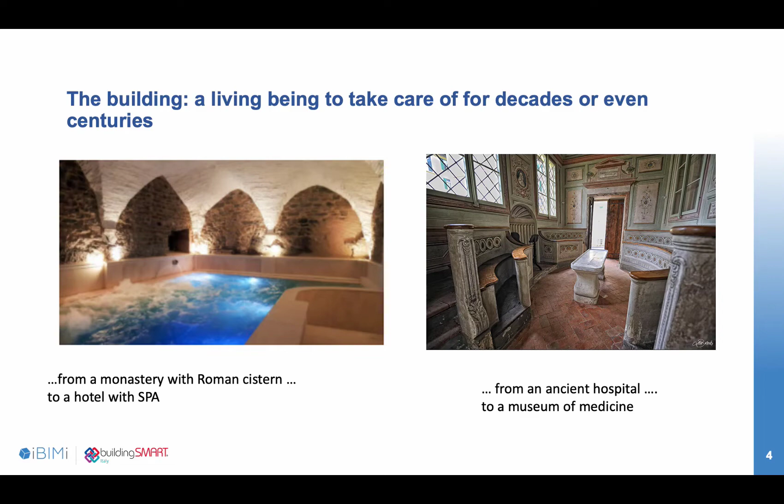A building may have been conceived and built in the Middle Ages, then be adapted in the Renaissance, and nowadays may need a change of use or energy requalification. But even more modern buildings that were built 20-30 years ago may need renovation. All the information that can be collected from what exists, if available, will be in analogical format, and in any case it will not directly be processable by software. Therefore, BIM for existing buildings means, first of all, to collect the information in a systematic way, to verify its correspondence with reality, and then to make informed decisions based on simulations obtainable with software.

European directives on energy performance require the refurbishment of at least 3% of state buildings, and many of these buildings are listed. It is possible in these cases to use EPC if the investment can be recovered in 10 to 20 years. However, existing building refurbishment needs to consider different constraints such as compliance with urban planning, safety and security, architectural barriers, restoration rules, and needs to ensure the functional use of the different zones with the right lighting and comfort, and of course the reduction of natural resources.

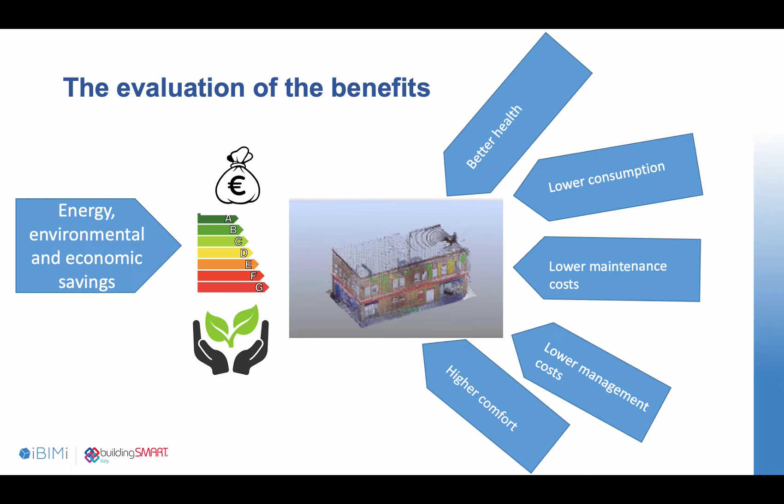The use of BIM for energy performance contracting is a means to build a trustful balance between the achievable saving and investment value because it is based on reliable data. The point cloud can provide very faithful geometrical information, while other advanced techniques can provide the exact position of the different HVAC systems. On this basis, the evaluation of different scenarios can be made and reliable computational data can be obtained through BIM 4D and BIM 5D for the evaluation of time and costs. This is very important for the owner, who can make informed decisions.

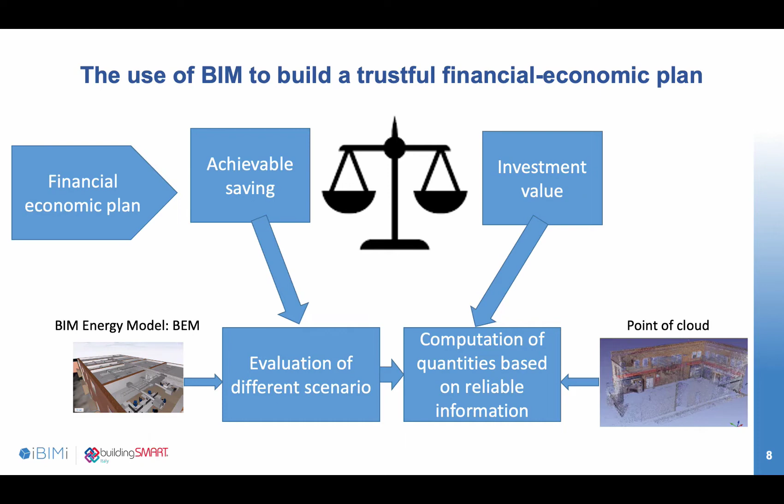BIM is always important when looking at the entire life cycle, as we know that the building sector is one of the highest impact on the environment because of the continuous use of the soil, emission deriving by the material used, emission during the construction, and above all emissions during the use.

Through an extended use of BIM, it's possible to reduce the impact of the built environment because we can make the refurbishment of existing building more than build ex novo. Reuse or recycling the materials or use low impact materials. Optimize the logistics in order to reduce the waste in the building site, and build and restore to obtain zero energy buildings.

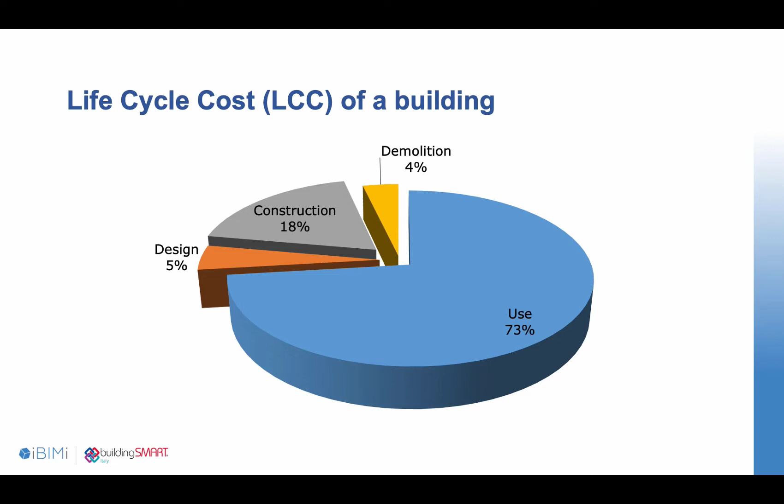It has been evaluated that if we look at the entire life cycle of a building, only 5% of the cost is related to the design, 18% to the construction, while more than 70% is related to the use of building. Therefore, a small mistake in the design due to wrong assumption will be paid for the rest of the life of the building.

The European Commission has published the result of an investigation that has shown that there is a huge gap between the energy performance that has been considered during the design, what has been obtained during the construction, and what is the real performance during the use. That's why it's very important to provide simulation with trustful data using BIM and have a monitoring system using digital twin to monitor the behavior of both occupants and equipment.

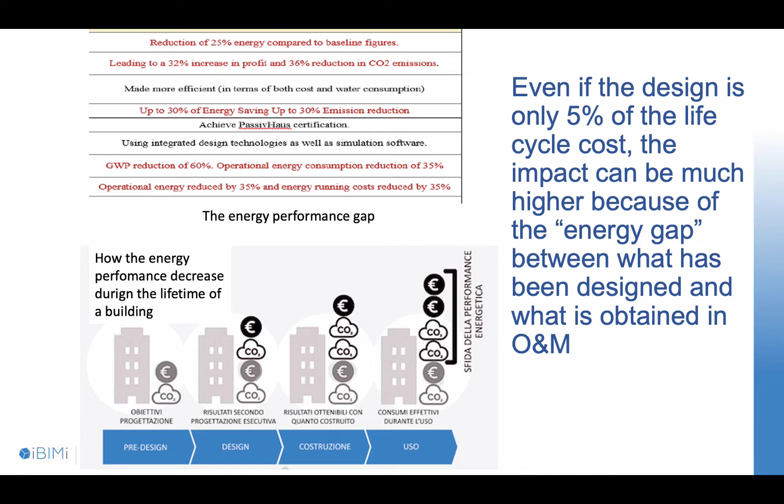The existing condition analysis is the most important phase for the refurbishment of an existing building. Any euro spent in this phase to obtain trustful information is paid back at least one order of magnitude during the next stage of the building lifetime, especially during the operation management. The focus in this phase is in fact on the exchange and the sharing of information among the different actors.

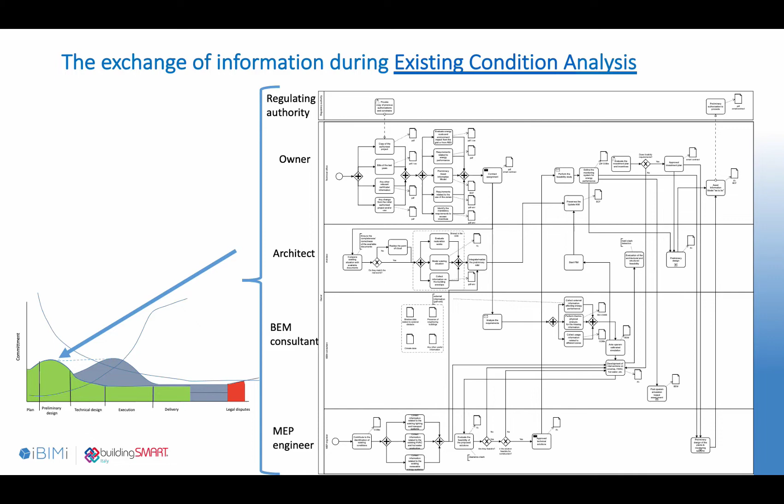During the preliminary design, the ESCO or financial institution providing the loan will have the role to make the financial evaluation of the intervention and compare with the possible achievable savings. With the use of BIM Collaboration Format, all the actors will contribute to find the best technical solution for the best performance and the minimum costs. Thanks to BIM and the information collected during the preliminary analysis, this process will be very interactive and fast.

The main output of the developed design phase will be a more detailed refurbishment plan that will leave less room to mistakes due to incomprehension and/or design errors as a consequence of interference between architectural and HVAC plans. During the technical design, all the choices will be frozen so that the financial plan will be even more detailed. The model of the refurbished asset will be enriched with all the information related to products and equipment that will be used during the construction phase. This model will be the base of the contract with the constructor.

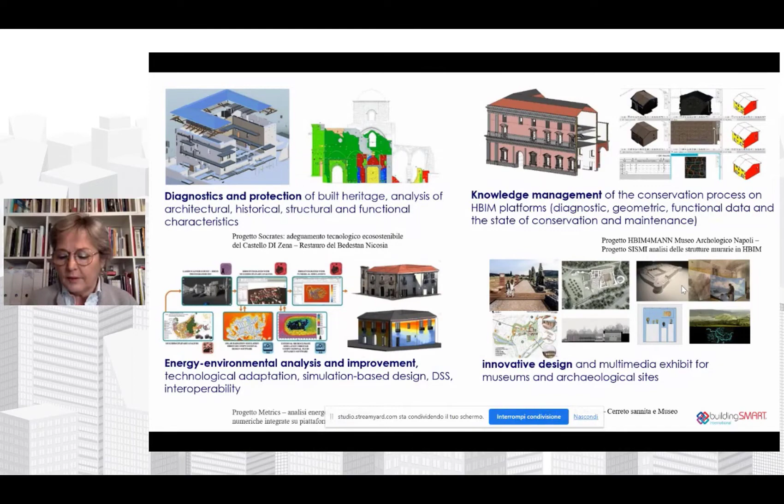Coming back to the BEEP project, the project is financed by the ENI CBC Med European program, which is the largest cross-border cooperation initiative implemented under the umbrella of the neighbourhood instrument. The objectives of this instrument are the consolidation of the relationship between bordering countries by enhancing social and economic development, also through environmental challenges. That is the priority faced by the BEEP project.

This is a consortium. It's made up of 8 partners out of seven countries of the Med area. 4 of them are European: the ICPC-ECNR, Minuti Associati, Istituto Valenciano della Edificazione, and the Cyprus Institute. The other 4 are non-European of the Southeast Mediterranean: the Egypt-Japan University of Science and Technology, the Royal Scientific Society of Jordan, the Center of Cultural Heritage Preservation of Palestine, and the Lebanese Center of Energy Conservation.

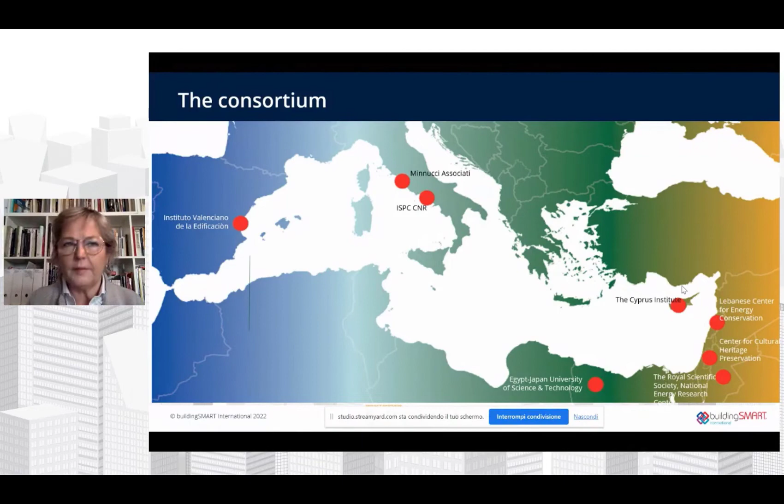In this way, we could test these emerging technologies in 8 different countries to demonstrate its scalability to the entire building stocks of the Mediterranean area. Our project tackles 5 main issues and challenges. The leitmotif is the approach to energy efficiency of the historical public heritage by the use of strong digitalization of design and decision support tools. The framework of the project.

Despite the European Union being an early mover on climate change adaptation and mitigation policies, a coordination action for the built heritage is still lacking. Under the momentum of the European Green Deal, the Climate Heritage Network, led by Europa Nostra, has recently published the European Cultural Heritage Green Paper, in which heritage is finally framed in its dimension as a key resource and a driver for the fight against climate change. I just want to remember that Securba was one of the first European projects dealing in this sense and was coordinated for Italy from my institute.

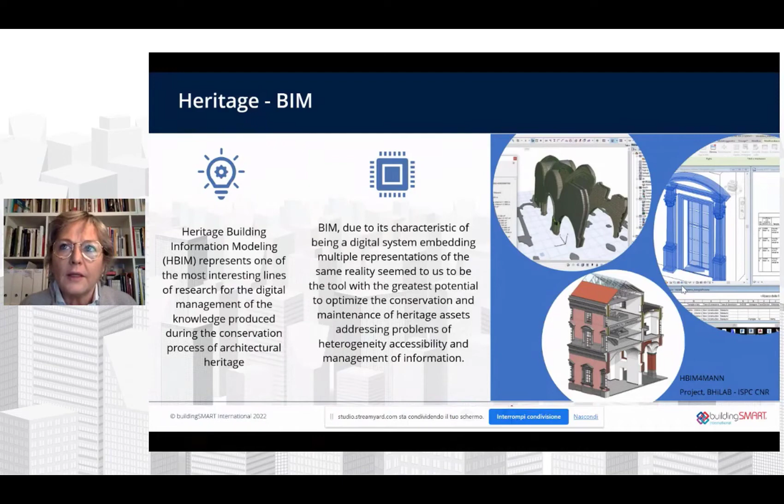Why the choice of heritage BIM? BIM for us represents one of the most interesting lines of research for the digital management of the knowledge that has been produced during the conservation process on architectural heritage, as well as the building performance simulation that allows the study and the optimization of energy performance in an interrelated way, by the creation of a behavioral model of historical manufacts and all of its components, such as the envelope, the technical system, the occupier behavior.

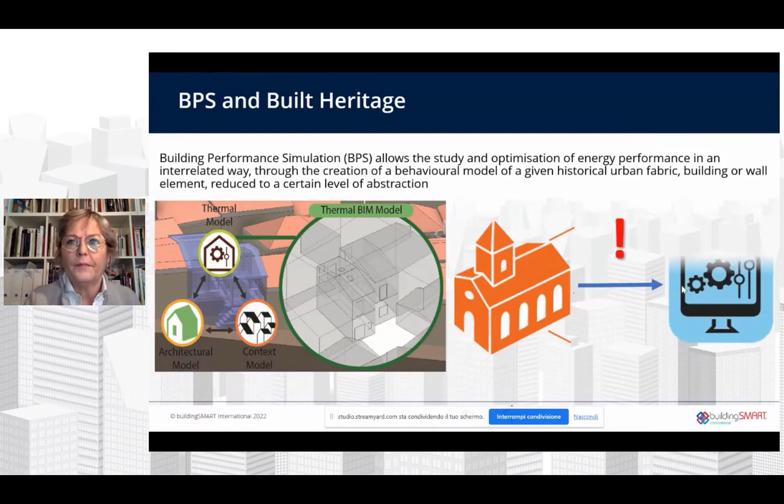Like BIM, building performance simulations involve a simulative approach, but in a different way. Building numerical simulation can be attributed to the category of non-destructive analysis and are particularly interesting tools to support the conservation process in historic buildings.

The fourth theme is the interoperability between the two simulation environments, HBIM and building performance simulation. Although the HBIM model already contains a large part of the data required for simulation, saving time and costs by reducing the risk of errors, the data transfer is not very efficient, especially on historic buildings. The transfer takes place mainly through two open file formats, that are IFC, that we know, and Green Building XML, gbXML format.

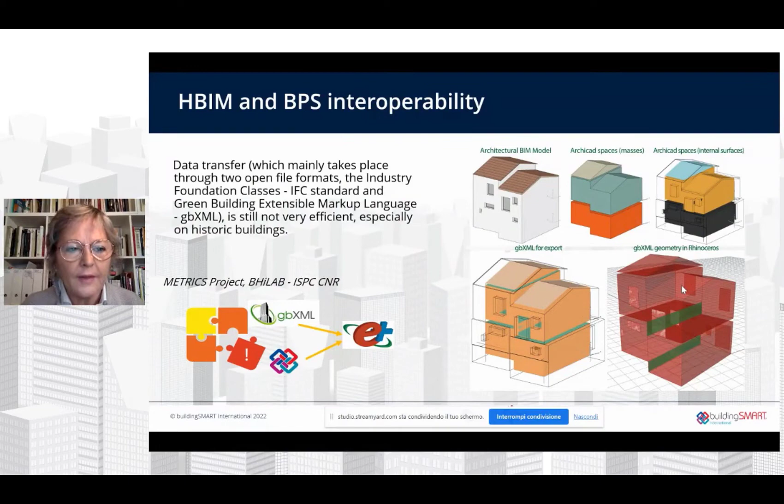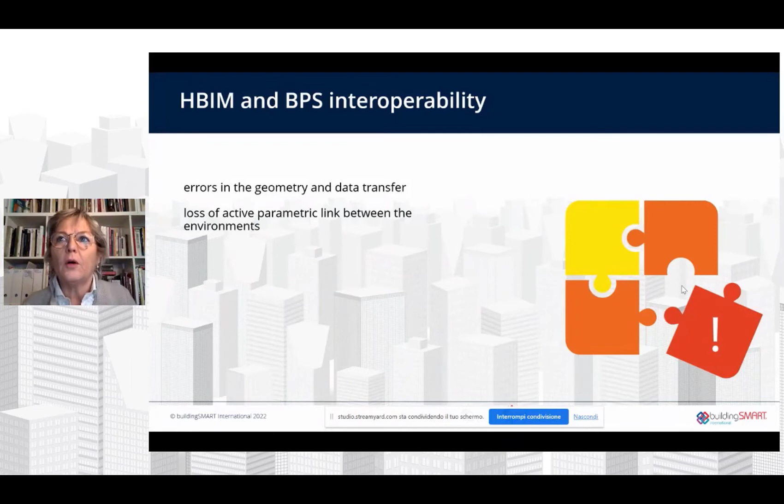The interoperability problems concern the data re-input, the lack of data exchange between the two environments, errors in the geometry, and data transfer loss of the active parametric link between the two environments. In the end, either the BIM model isn't BIM anymore when you transfer to the simulation, or the simulation starts from scratch, meaning the loss of one of the main benefits of BIM.

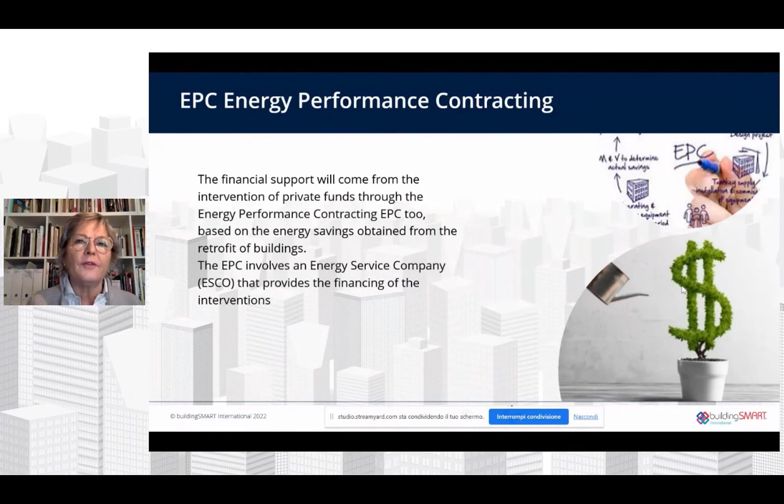Then there is a last but very important tool that Anna also described in the previous presentation. That is a tool that provides public administration a powerful method for the energy, to realize these interventions, because it provides private funds for the interventions.

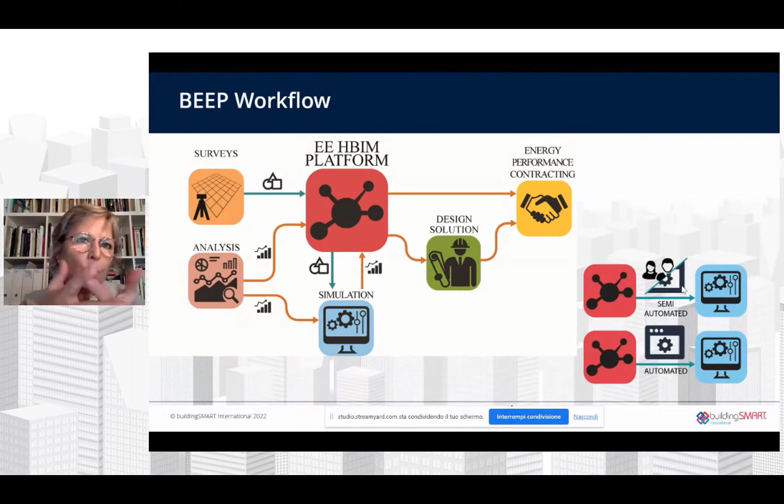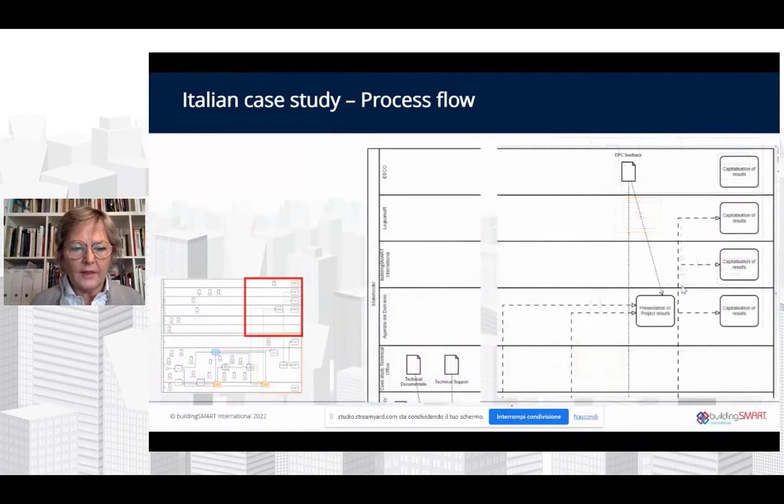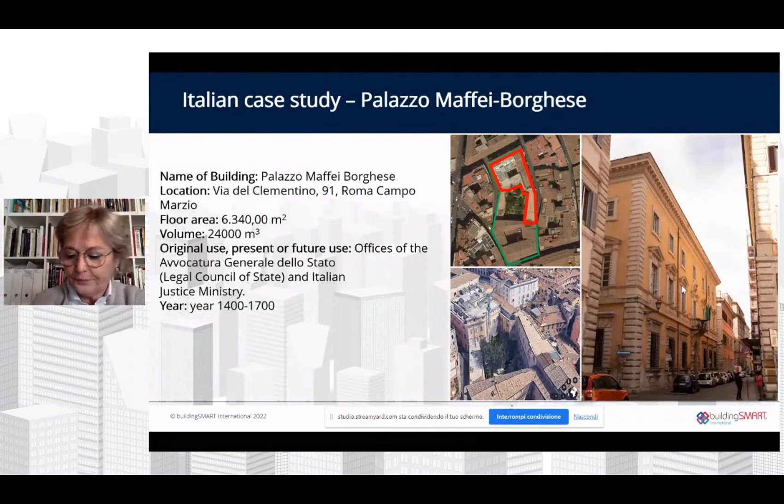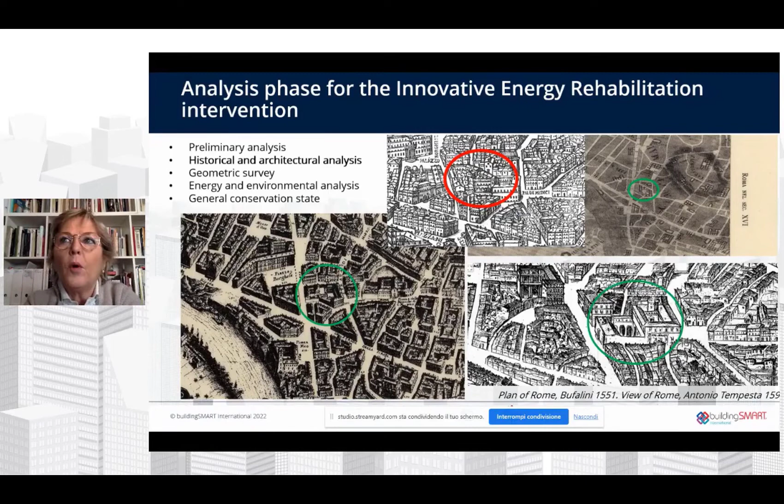Okay, so this is the Italian case study. It is a very prestigious and important building. It is located in the Renaissance center of Rome. It is owned by the state property, so it is a public building, and it is currently the seat of the state advocacy. The first activities that we perform regard historical and architectural analysis that is essential for the knowledge of the building. It's also a starting point for all the other in-depth analysis.

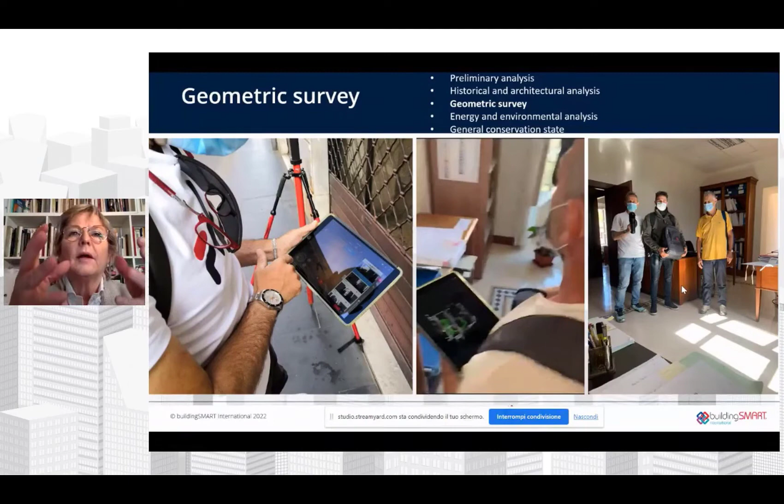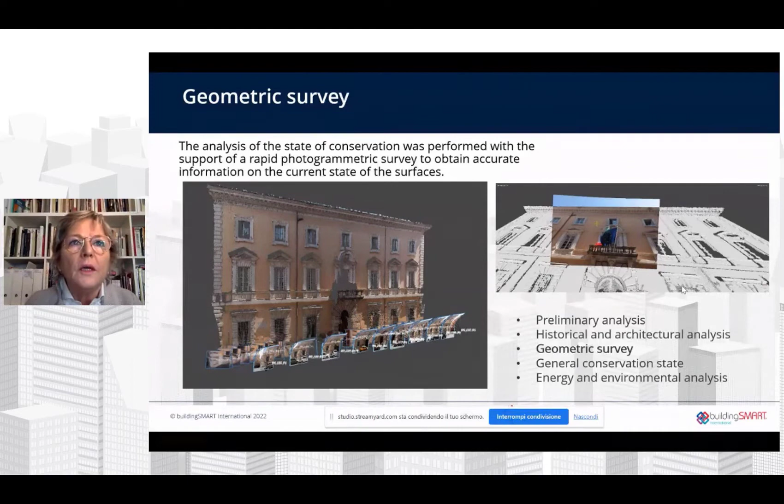Then we performed a set of energy and environmental analyses, starting from thermographic surveys with the aim of getting information on the external and internal walls of the buildings. This was the base for the identification of the wall stratigraphy, which has been combined with the consultation of traditional architectural manuals.

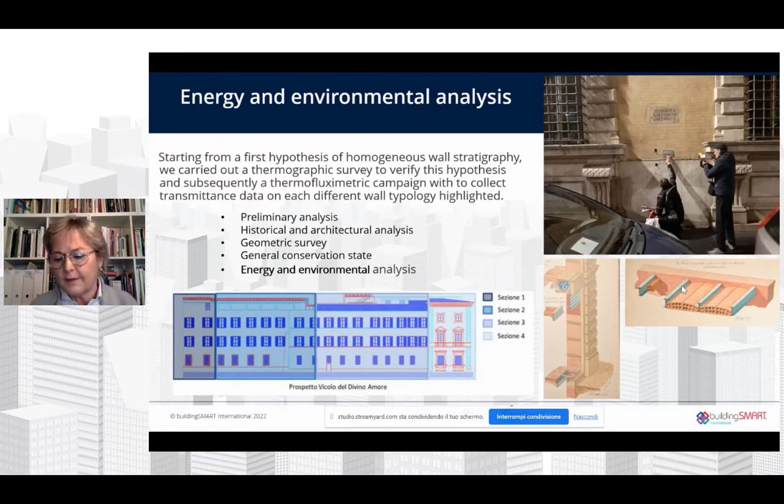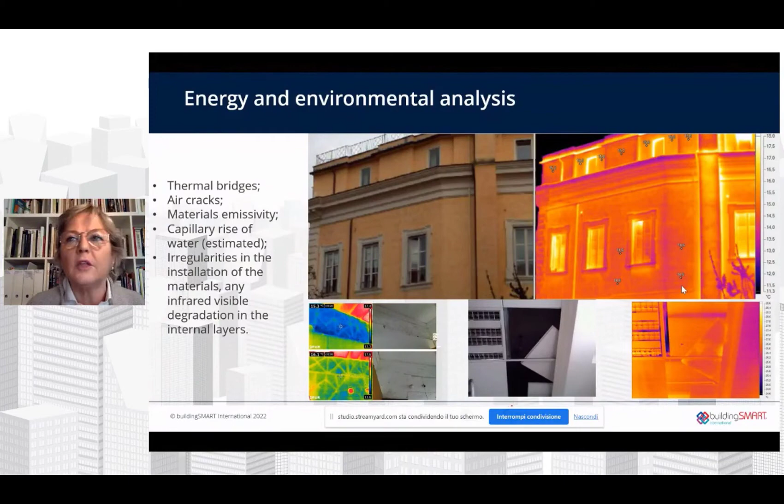The thermographic analysis also allowed us to identify more recent interventions and transformations undergone over time, as well as confirm problems such as thermal bridges, air cracks, material emissivity, capillary rise of water, irregularities and degradation in the internal layers.

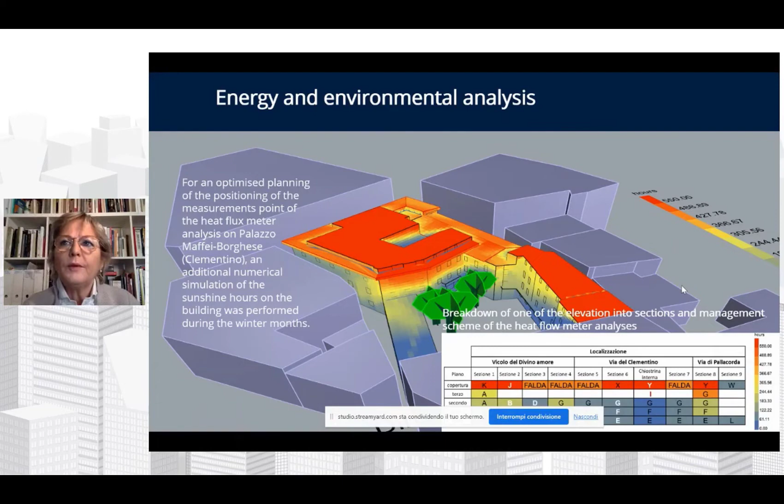We also performed a set of energy analyses. This analysis made it possible to identify the measurement points for the thermofluximetric analysis. For an optimized planning of the positioning of the measurement points of the heat flow analysis, we performed an additional numerical simulation of the sunshine hours of the building during the winter months. For the simulation, we used the combination of Rhinoceros software with Grasshopper and the Ladybug environmental analysis plugin.

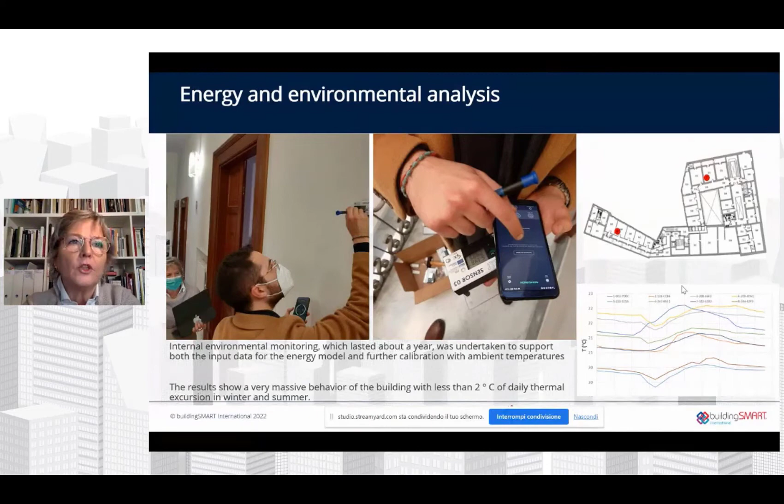At the same time, we also carried out the analysis of the indoor microclimate, providing useful data for the calibration of the building dynamic simulation model. Here we can see a phase of the energy efficiency building information model, which was the next step of the project. This is a centralized repository to optimize the management of the large amount of information deriving from the different analyses that we carried out.

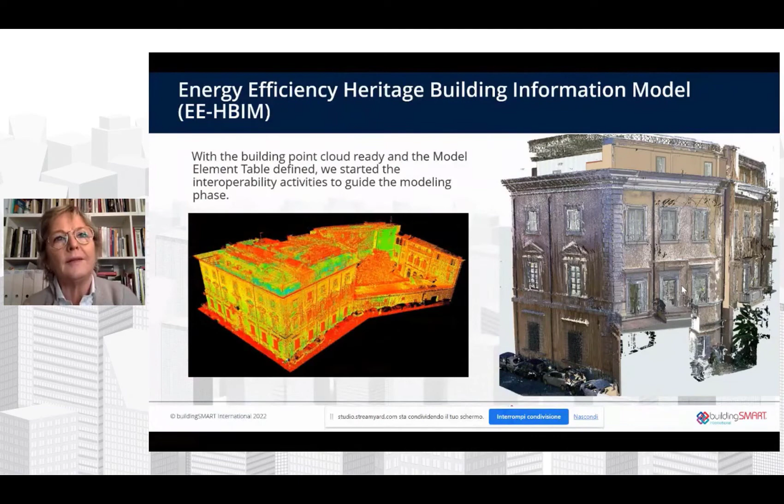The interoperability studies aim to find a balance between BIM and energy modeling that can reduce parallel operations and the risk of errors in data passage while keeping the model consistent. The other aspect is to keep, also thanks to a clear definition of the model uses, as much as possible every expert involved within their disciplinary comfort zone.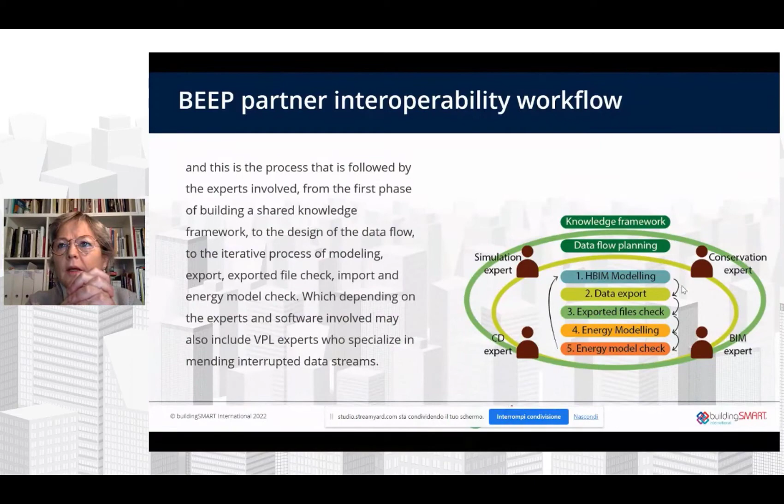And this is the iterative process that is followed by the experts involved from the first phase: from a shared knowledge framework, to the design of the data flow, to the iterative process of modeling, export, control, import, and final control, which, depending on the experts and software involved, may also include an expert who specializes in handling interrupted streams.

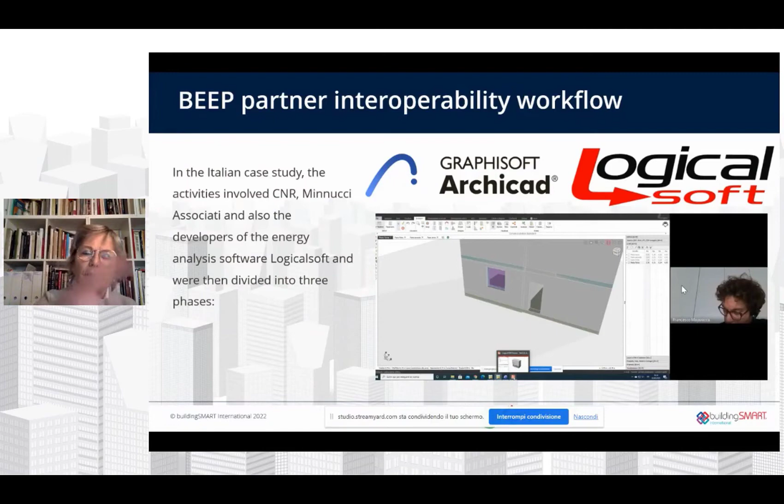In the Italian case study, the actors involved are the coordinator, Minnucci Associati, and the developers of the energy analysis software, Logicalsoft, and the process is divided into three main phases. The first is the construction of the shared knowledge framework and data flow planning among the experts involved, which were then consolidated with a test on simplified models to identify and address general interoperability problems, then a test on a portion of the case study representative of its specific problems. A lot of problems that we addressed.

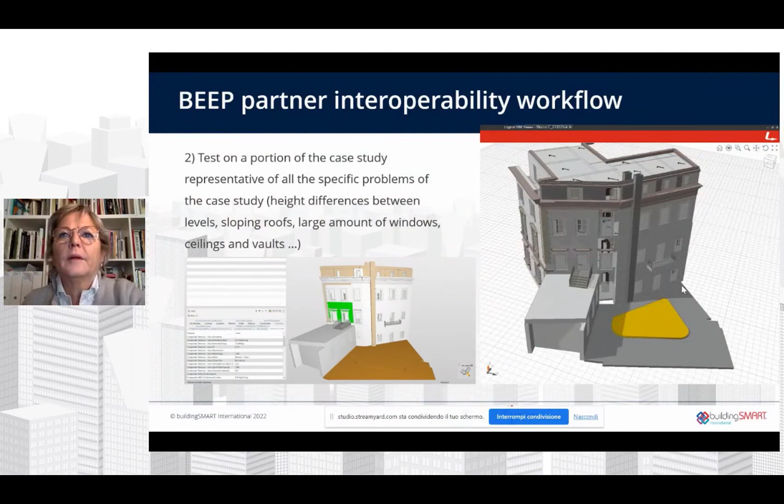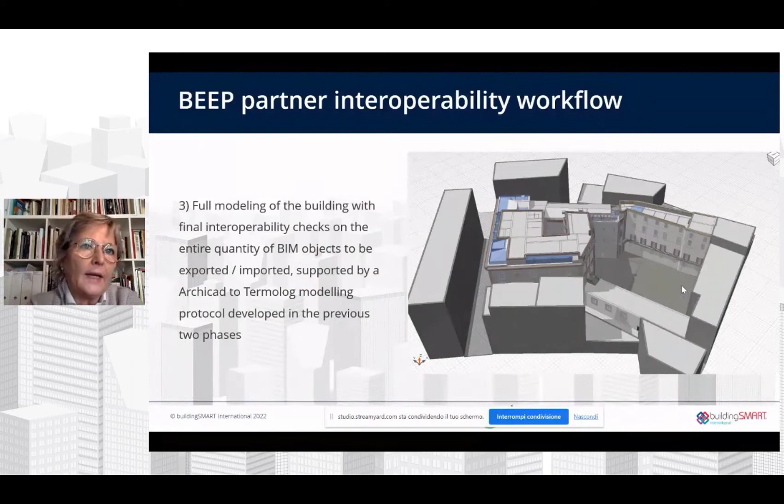And then full modeling of the building, with final interoperability checks on the entire quantity of BIM objects to be imported, supported by the Archicad to Termolog modeling protocol developed in the previous two phases.

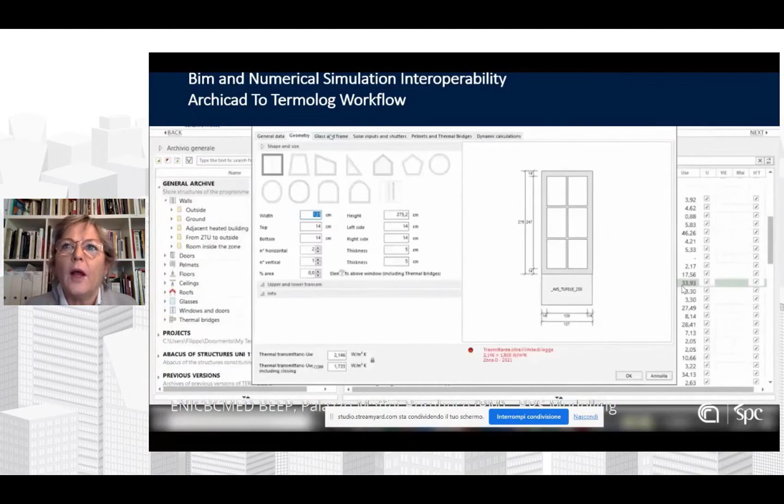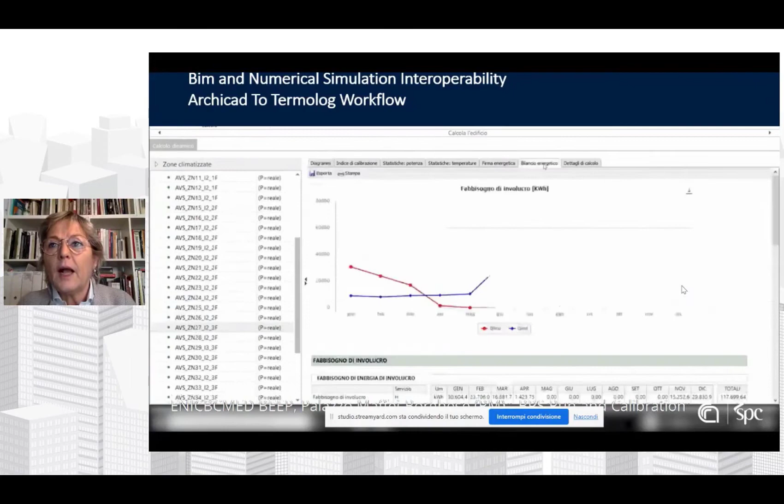Here you can see the video that represents the final HBIM model built on the basis of the modeling protocol that was developed by the group and which was embedded into an entire process guideline, including all the software combinations, of which we have already published parts as a deliverable, and which is guiding the whole consortium dealing with the various case studies.

After a post-processing phase required by the workflow, we arrived at the final geometric model with the thermal layers with their defined stratigraphies. The thermal zones were then modeled with an eye to the Italian legislation, which imposed particular constraints, and all of this was part of the actual calibration process.

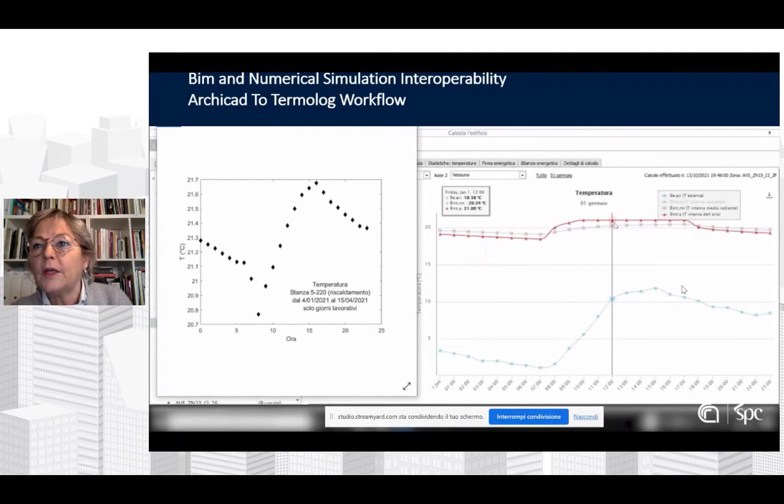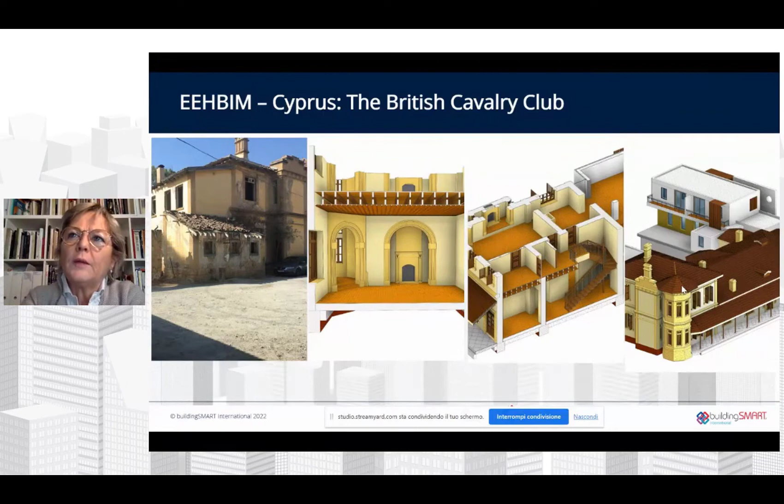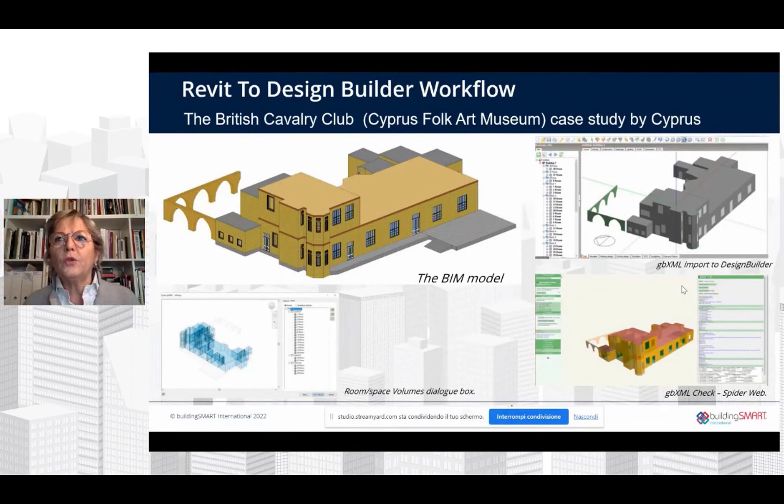I will briefly show the other part of the study. In Cyprus, the British Cavalry Club is a listed building rich in heritage significance that will host the new Folk Art Museum of Nicosia. The Cyprus partners use DesignBuilder. This is a user-friendly modeling environment for the EnergyPlus software tool, developed to ease the building simulation process.

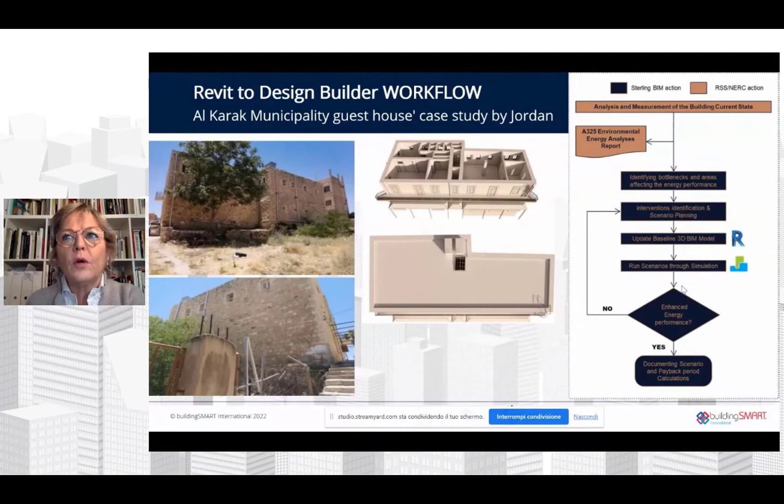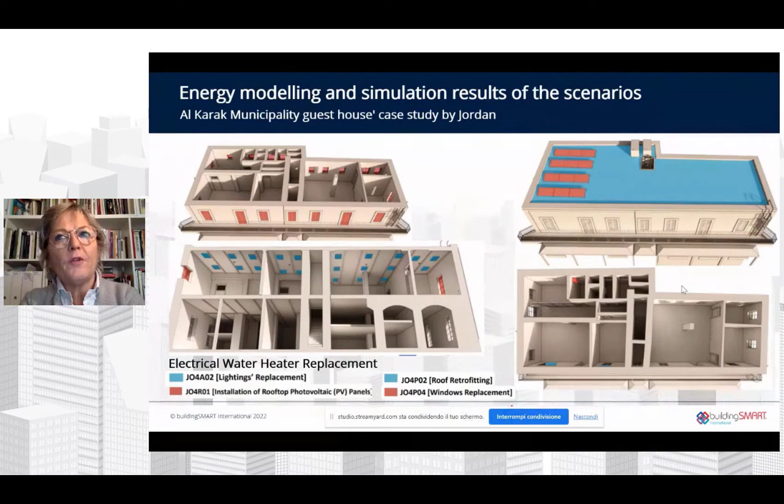The Spanish case study is the Palacio de Catalunya in Valencia, Spain. The activities in Jordan include the study of the Al Karak municipality guest house. This is a municipal building that, like most Jordan buildings regarding energy efficiency and thermal comfort, has a very poor performance. These are the results of the scenario simulations. This project is considered the first of its kind in Jordan regarding objectives and outcomes. Throughout this project, we have produced the first ever officially signed BIM execution plan in Jordan.

The measures for energy innovation in all countries were mainly of two types. As passive measures, the most used by the partners in the retrofit scenarios have been the incorporation of thermal insulation from inside of the building and the incorporation of shading systems. As active measures, the most popular are the renovation of the lighting with LED lamps, the replacement of heating and air conditioning equipment with efficient ones, and the incorporation of a building management system, which is a very important tool.

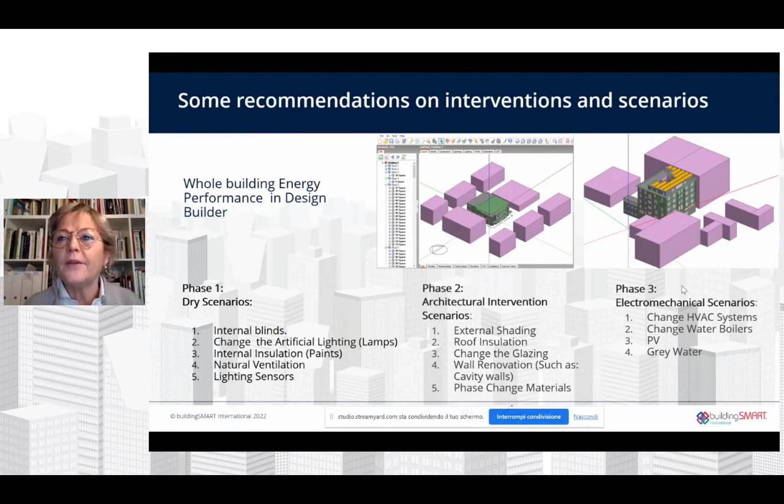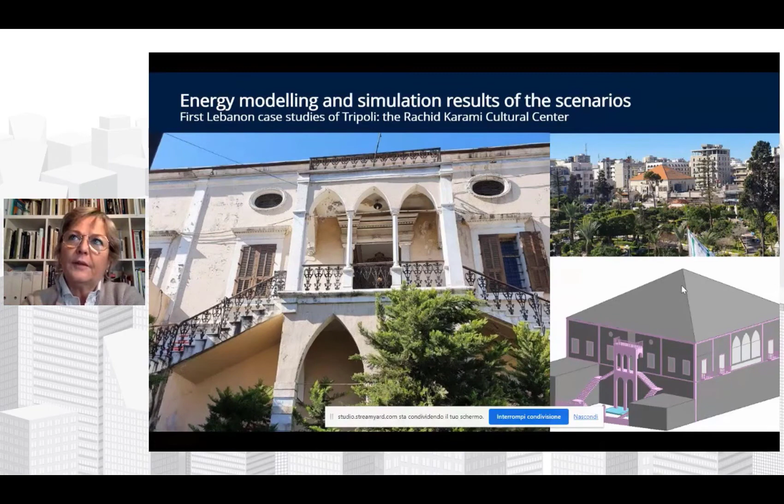This is the Palestinian case study, the Morcos Nassar Palace. The Center for Cultural Heritage Preservation is a big partner with great skill in heritage conservation, but they had never dealt with other issues, energy efficiency, built energy or BIM. So they acquired experience and skills during the life of the project.

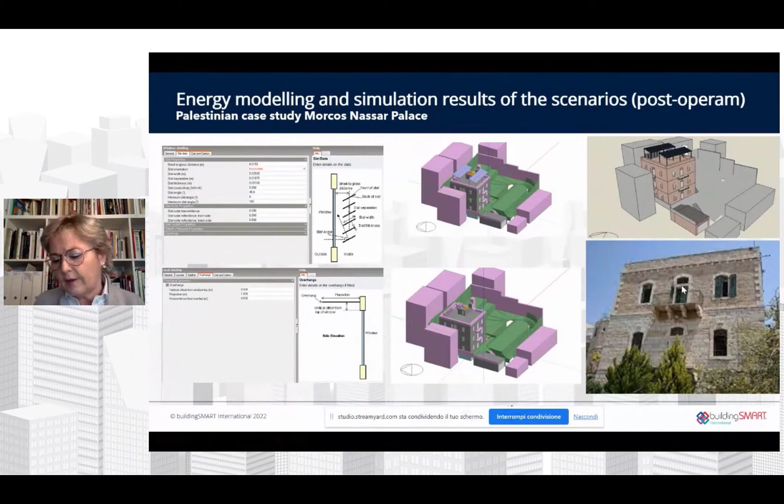So, in conclusion, I can say that the BEEP project's main result was the establishment of a common framework among the partners to set up and harmonize the project workflow depending on local specificities. Furthermore, we have not only reached but even exceeded the performance indicators requested by the program in terms of carbon dioxide avoided, kilowatt-hours of renewable energy produced and self-consumed.

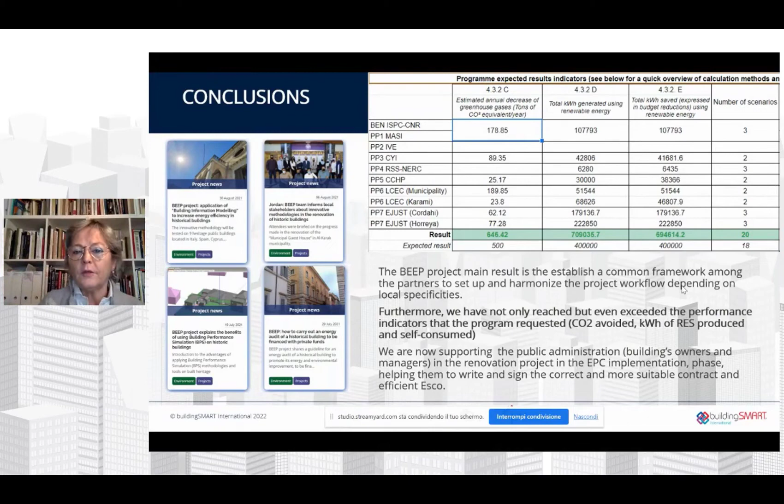So we are very satisfied with the results, but we are not ending the project. Now we are supporting the public administrations, the owners and managers, in the renovation project and with the energy performance contract implementation phase, helping them to write and sign the correct and most suitable contract for an efficient ESCO.

Thanks to all for your attention. Thank you, Elena. That was an excellent presentation. Really interesting to hear about the BEEP project. Particularly good to see the many examples and case studies that you were able to present. So thank you for that.

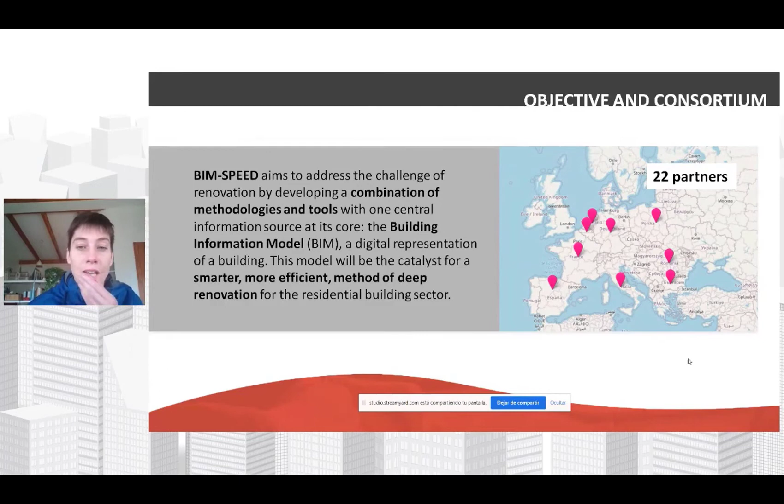Right now, we are not as far as the other project that we saw before. We are right now developing the demos, so I will not be able to show as much information as Elena, but still it's really interesting. The BIM-SPEED project is based on a platform capable of providing a collection of tools and services all related to renovation, from point clouds to the program that I'm going to show you today, because it's the part that we have developed and the part that we are really interested in.

You can get access to the platform from the BIM-SPEED webpage, and I encourage you to go there, also because there are already a lot of tools connected, including the one that I'm going to show you today. I think there are around 30 tools. For us this is really exciting because, at least from my experience, it is one of the times that more tools have been connected to the same platform related to the subject of energy efficiency and renovation.

The tool that I'm going to speak about today is called openBIM Analytical Model. What this tool does is try to solve the problem that Elena was talking about, this problem of interoperability. I want to go really quickly to show you the demo buildings that we have, which I didn't have in the presentation.

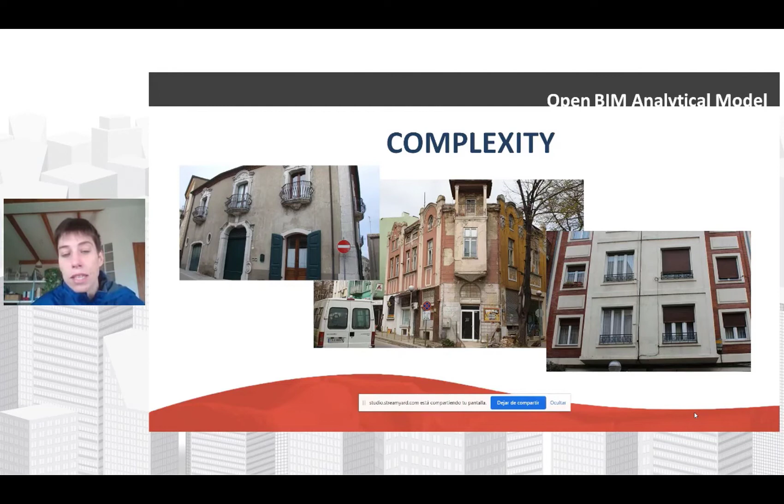We detected mainly two problems in this workflow of how to make the energy simulation of a historical or refurbished building. The first one was complexity, the complexity of the buildings themselves, sometimes only because of decoration, when in the end you have these EnergyPlus or DOE engines that work with really simple models. This is one of the problems we wanted to address.

The other one, as Elena said, is interoperability. Right now we have a lot of tools to design the BIM model, starting with Revit, but also Allplan and Archicad. We ourselves have a free tool to build BIM models. And these tools are kind of isolated, doing their own thing, and that's a problem.

And then we have the engines. At CYPE we currently work with EnergyPlus, but there are other engines like DOE that are isolated between themselves and also isolated from the new BIM modelers. Well, they are not new, but okay. So these were the two problems: complexity and interoperability. Then we defined a really simple workflow.

The first step is to create the BIM model and be capable of importing it correctly. The second is how, with these imported BIM models, we create a highly accurate energy model, meaning a model that can be input into simulation engines. And the third is how we import or export all this data back to the BIM-SPEED platform.

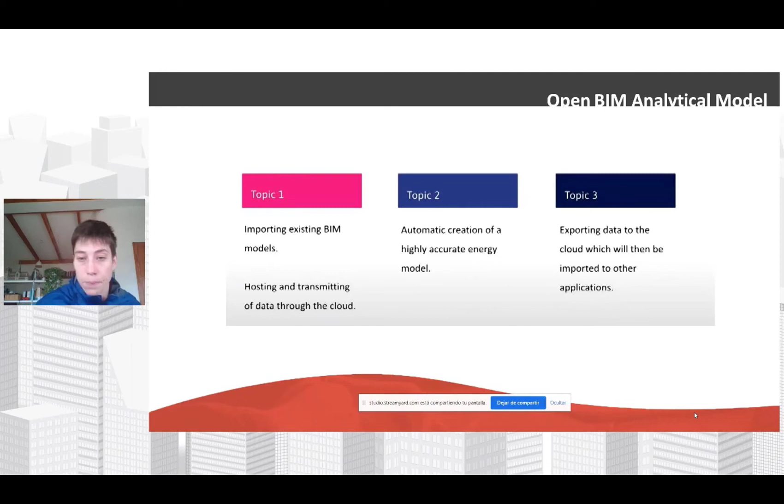Basically, how we approached this problem is that on one hand we have the architectural model, composed of walls, slabs, windows, doors, etc. This is what we call at CYPE a model of solids. Then we have the analytical model, the one used by the engines, composed of surfaces, edges and boundaries. This is a geometrical model.

So we had these two models, one in front of the other, fighting to get to the energy simulation. What we did is what we always do at CYPE when we have a problem: put it in another box, separate it from the architectural modelers and from the simulation engines. We solve this problem in a separate program.

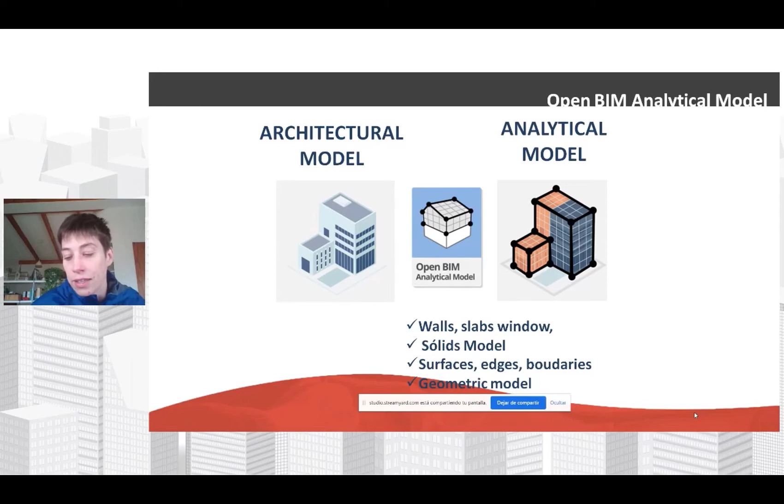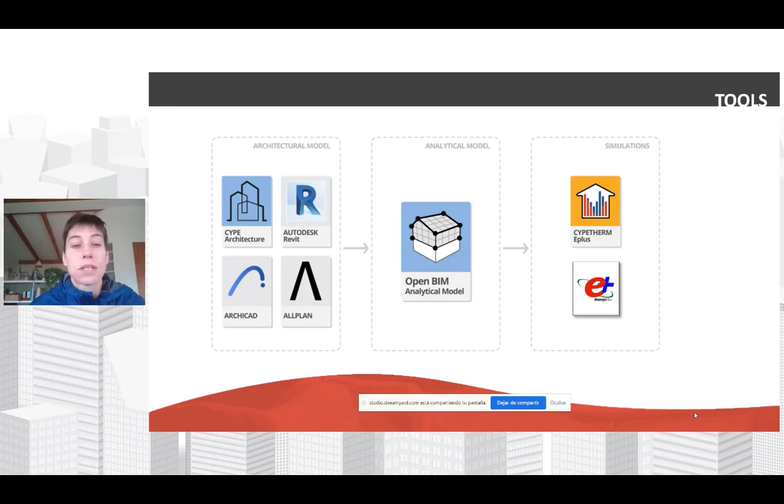We created this openBIM analytical model. The idea for this model is that it will follow these steps. First, you create an architectural model, and this architectural model is going to send the information to the openBIM analytical model in IFC standardized format. It's really important that spaces are defined in this model, because without the spaces, an openBIM analytical model will not be capable of creating this geometrical model.

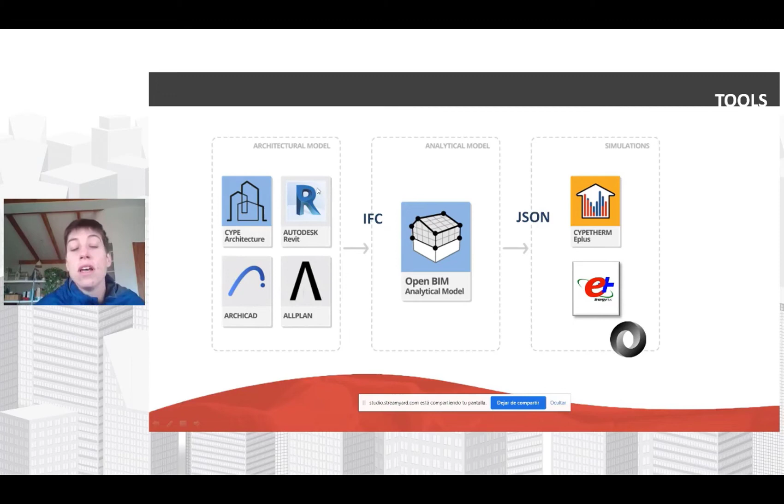Then when we create this geometrical model, we send this information. Right now we are sending it in JSON. It was interesting to see that you send the information in XML in the other project, but we are using a JSON file right now to input this information in our tool CYPETHERM that works with EnergyPlus. The idea here is to be capable of retrieving information from a lot of modelers and then manage the information in a separate program.

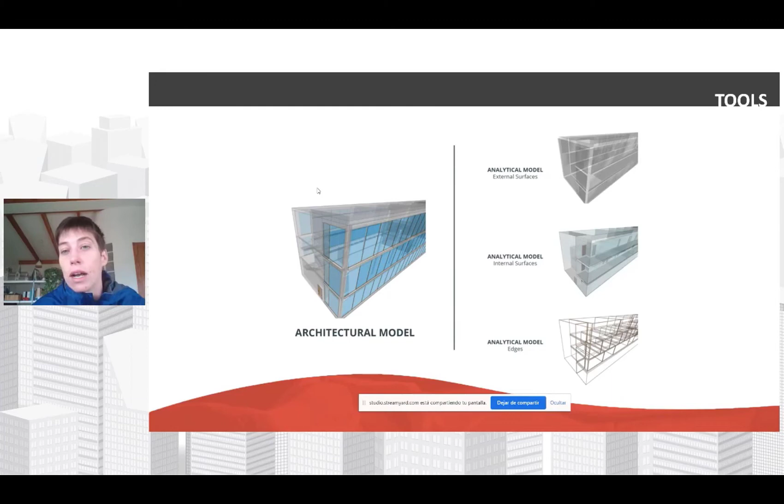Here you see that you have the architectural model and then the analytical model of external surfaces, internal surfaces, and edges. Here you have a capture of the program. The program is completely free. We are looking for more people to input buildings so we can test how it's performing.

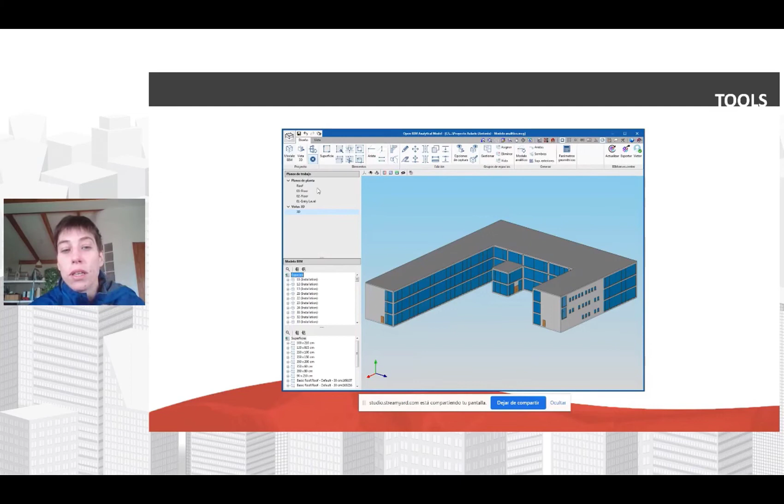So what we have also given in the tool is a series of tools to correct this model in case it is necessary. For example, because a window is really complex and the program has not understood how this window works. So you will have here expert tools to address these issues in the model and be capable of exporting. Here are some more images of the information in this model. You can see here an edge, for example.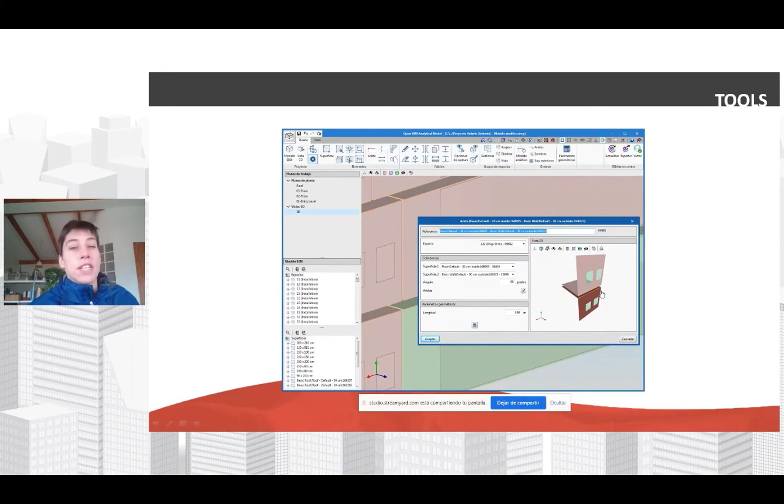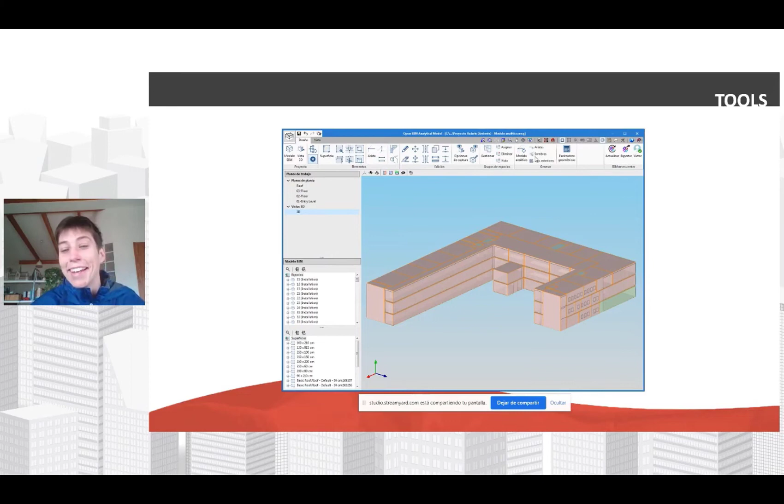And again, sorry for being repetitive, but the most important thing for us was that this tool will be for energy experts. They will be capable of generating this model automatically, but they should also be capable of correcting the model in case it is not well done automatically by our algorithm. That's why we are always looking to input more models. Your project again, Elena, is really interesting to see where we can correct this algorithm that we have created.

I want to say that for us, an analytical model is also a BIM model, but another type of BIM model. We have this idea of a building that can be composed not only by a single source of information or truth, but by a lot of models that address different parts or different problems regarding the buildings. In this case, we believe that this analytical model, if it's in an open format, is also BIM, even though it's not inside the IFC, and we should go with that.

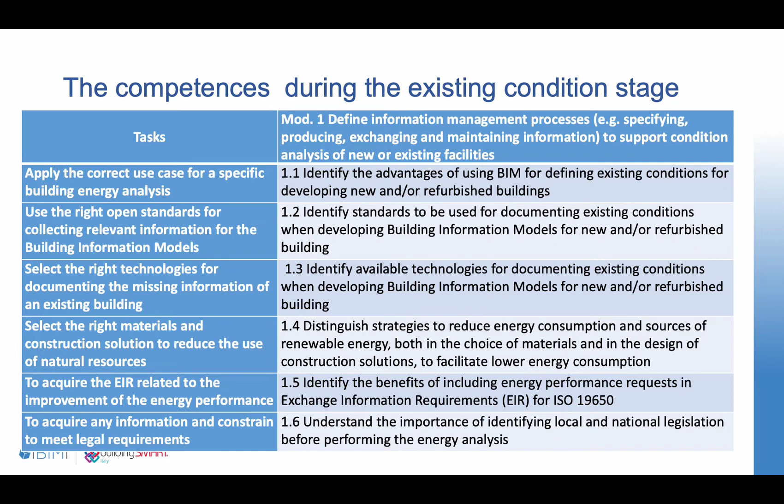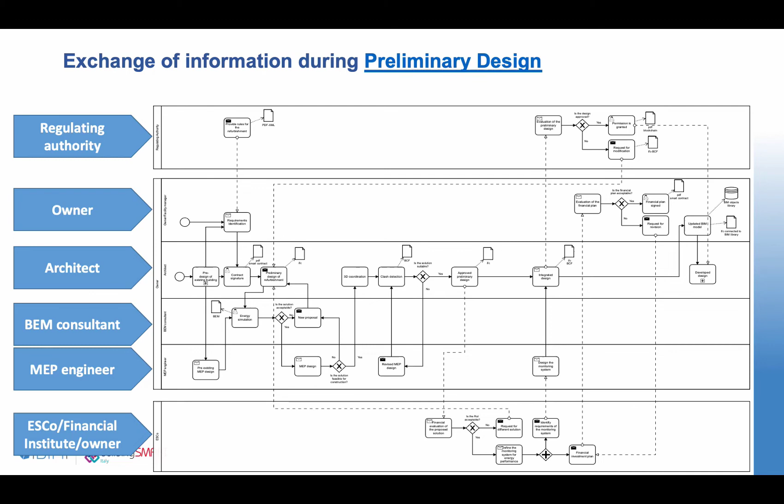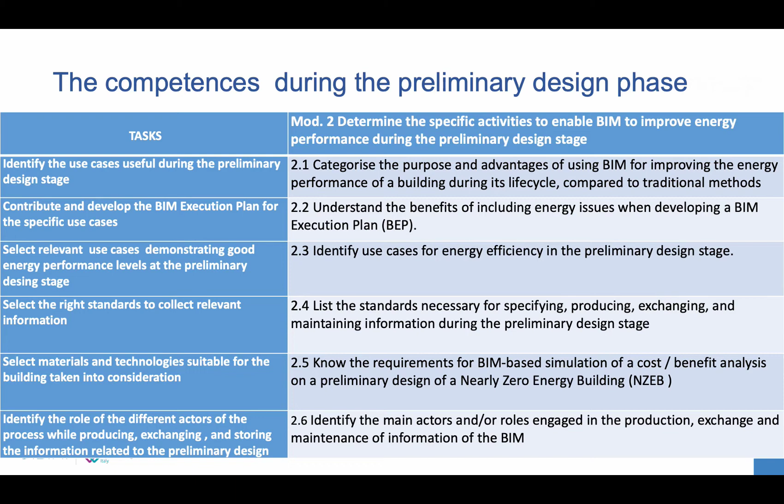We have seen in the previous presentation that during the preliminary design, the ESCO or financial institute or owners themselves will make the financial evaluation of the intervention and make informed decisions about the refurbishment. Now we describe the competencies needed to collect, exchange and store the correct information in this phase. The same structure used for the existing condition analysis has been conceived for the preliminary design phase. Here again, the tasks and the related learning outcomes have been identified.

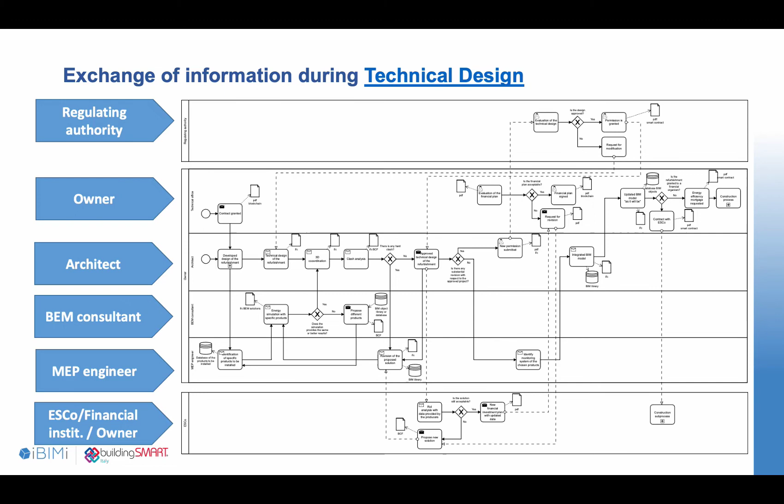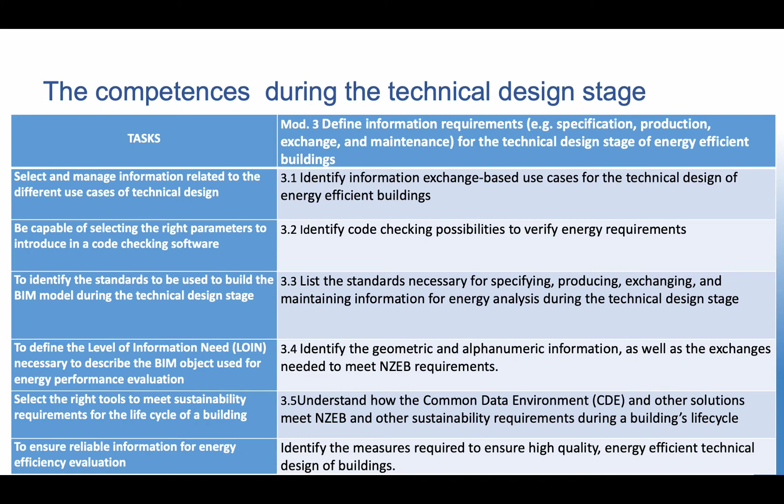The main output of the developed and technical design phases will be a more detailed refurbishment plan that will leave less room for mistakes due to incomprehension or design errors as a consequence of interference between architectural and HVAC plants. This is the exchange process in the developed design phase, and this is the process during the technical design, where all the choices will be frozen so that the financial plan is more reliable and can be used as a base for the contract with the constructor. Here again, tasks and learning outcomes are described. These competencies are necessary to ensure that every information is collected, managed, shared and stored in the right open standard and among all the actors responsible for this process.

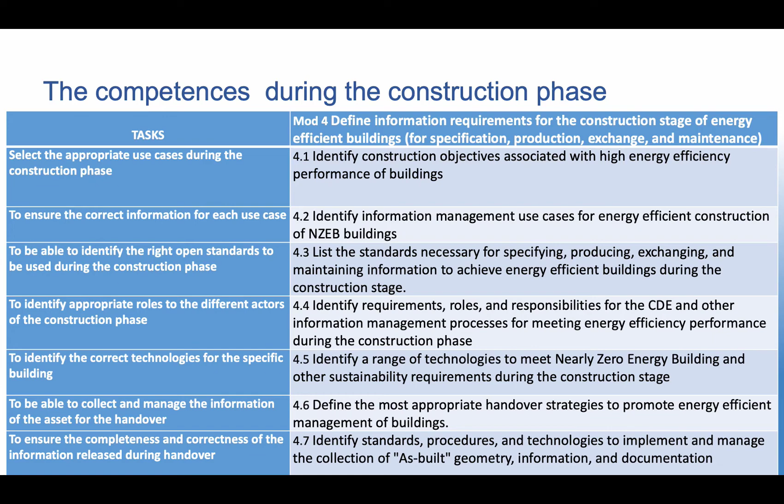The construction phase is the most challenging, as it is recognized that during the delivery most information is lost, missed or not updated. This is the main reason why the use of a building is considered the most expensive phase. The missing information can cause delay, damage or even disaster. All the problems during the management phase are related to wrong or unavailable information related to the installed equipment and systems. Again, we have identified the tasks and the learning outcomes to ensure the correct management of information during the construction phase and the delivery phase.

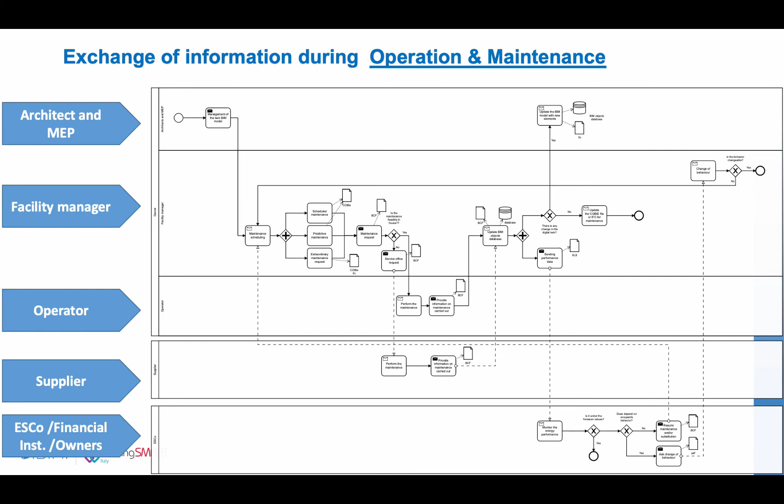The operation and maintenance phase is the one where all the advantages for the owner and facility managers are evident, but they will be reached only if all the previous phases have been executed as described. Also for the operation and maintenance phase, the tasks and the learning outcomes are identified. In total, the proposed qualification for energy performance and BIM will be based on 5 modules, each with 5-6 learning outcomes. We believe that especially for public buildings and historical buildings, it is essential to ensure that all the actors have the necessary competencies to take all the advantages deriving from the use of BIM.

Nowadays, with so many technologies and so many products, we believe that it is important to find a fast but also reliable system to recognize the competencies of the workforce called to make our buildings safer, more comfortable and more energy efficient. The European project ARISE will gather all the existing best practice on education and training in the fields of energy performance and digitalization. ARISE will set up a European platform for the recognition of competencies supported by blockchain technology.

ARISE partners have decided to use the bSI system for issuing an international qualification. bSI set the rules to develop a learning outcome framework and, through the chapters, recognize the training providers able to qualify people through a web-based qualification system.

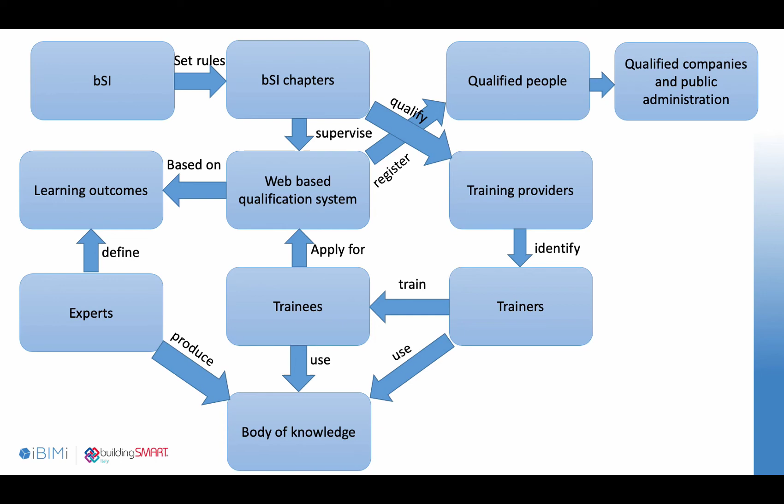To conclude, the European project ARISE intends to use the bSI system not only for the BIM competencies but also for the energy performance competencies, as even the best design can be jeopardized by bad implementation of the best available technologies. Any person will be able to access content through any learning platform and build specific professional competencies little by little through a maturity level system certified through blockchain technology to build a reliable recognition of competencies accepted by the market.

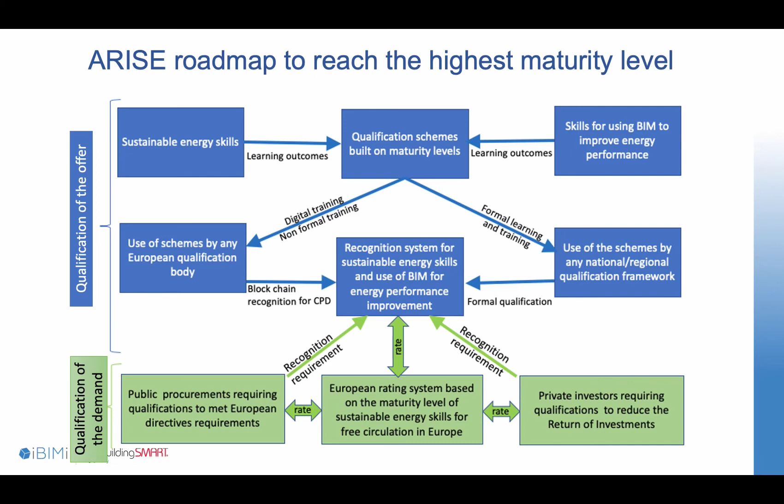The same maturity system will be offered both to the workforce and to the demand side. This is because a good offer is built on a good demand.